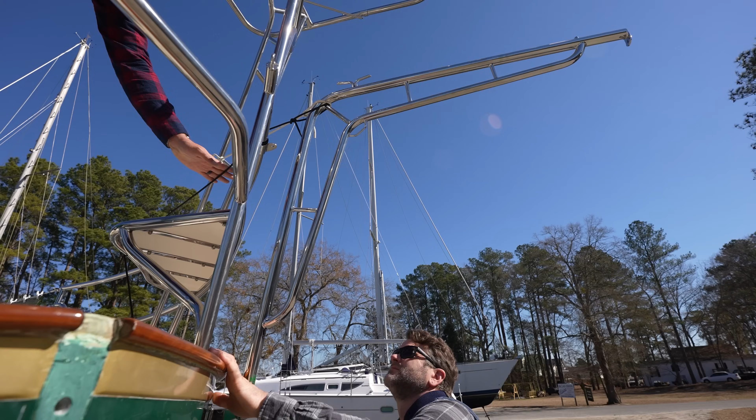All right, so today is the day where we turn this whole mini refit around. By that I mean it's the day that we stop destroying the boat and start putting it back together again. I'm gonna start putting the rigging together, start building our new furlers, and install our new chain plates.

Steve has invited us out for a cold weather sailing race. God, my heart is beating so quickly right now. It's like the perfect Saturday.

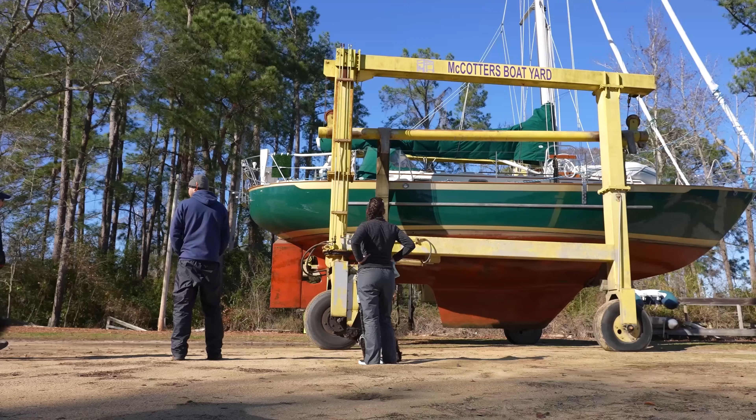I'm Desiree, and this is my husband, Jordan. We're sailing around the world, or at least trying to. We made it as far as Panama on our first boat, Atticus 1, which was a really small fixer-upper. Now we're on our dream sailboat, Atticus 2, but she needs some work before she's ready to cross oceans. So we're working hard to finish up the last of our boat projects so we can sail south to the Caribbean.

So the first step in installing our new chain plates is I've got to clean up and prep the areas where the chain plates are going to mount. But just like any project in the boatyard, step one is digging through all the nooks and crannies of the boat to grab all of my tools.

Okay, so don't tell Desiree that I'm showing you this. The quarter berth is a total disaster right now, and I feel kind of bad, but I don't really have time to clean this up much. We gotta just keep powering through and get these projects done.

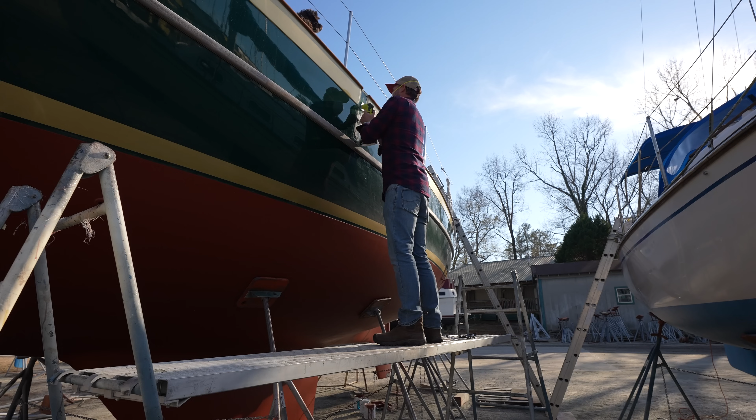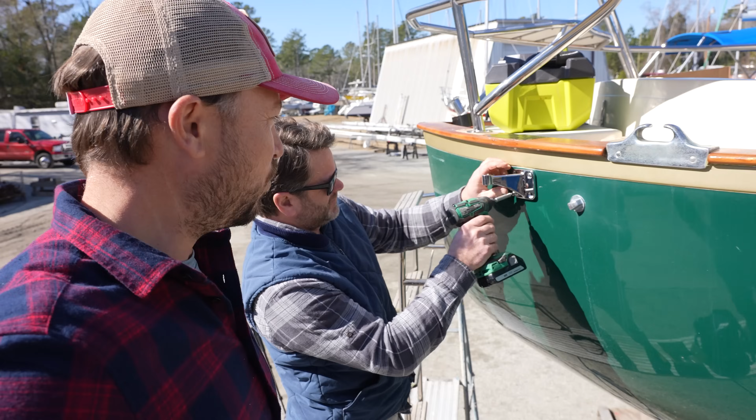Okay, so Mike's back and we're doing round two of dry fitting and measuring and getting everything ready for the davits. Basically we're gonna put in the lower brackets, dry fit them against the hull, and then measure for the top bracket.

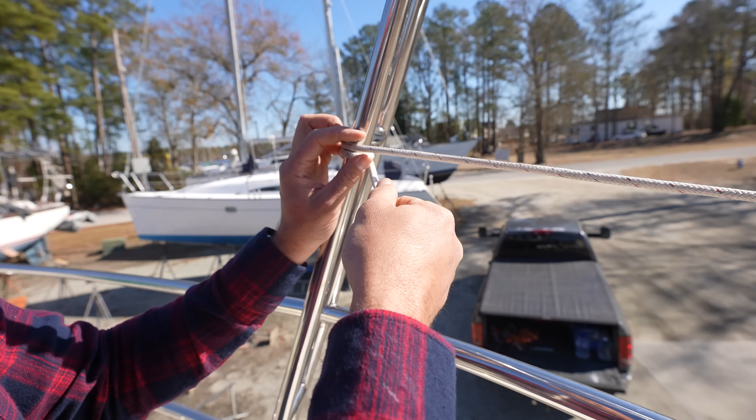You said the only functional issue is that it's center line, right? That it's up and down. This here is just purely aesthetic. Yeah, yep. I think it's perfect.

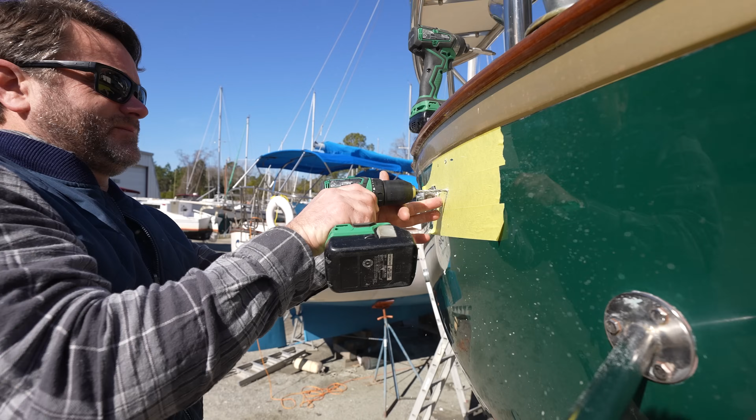Just to line up here, visually, they look like they're pretty much smack dab on. I think that's it. I think we're pretty much symmetrical.

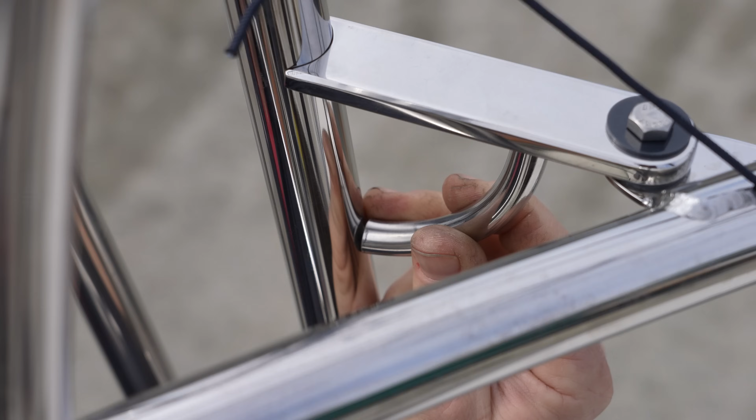Next step is we're just taking these little pieces that Mike made up, putting them in position and tacking them to the davits. Then Mike will be able to take the whole assembly and go back to the shop, fully weld it together, polish it, finish it, and then we'll be able to put these bad boys on.

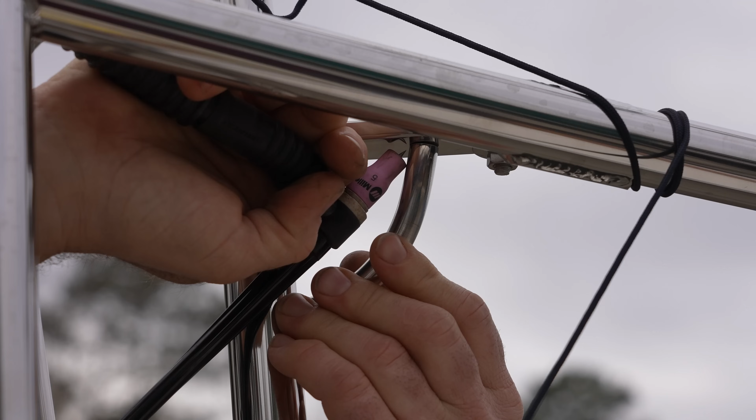Funny because I don't know what I was expecting, but that was really anticlimactic. I was like, we're gonna do it. Dang it, okay.

Hey, look at that good looking guy. How's it going, man? Good, man. Good, how are you doing? Good. It's been a hell of a day, but I'm ready to kick back and talk about sails.

I actually just chatted with John Kretschmer about what he likes to do with cutter rigs and how he likes to sail. He really likes to use the stay sail as much as possible, and over the years he's started having his Genoa size be smaller and his stay sail size be bigger. I like that idea because our Genoa is a little bit big.

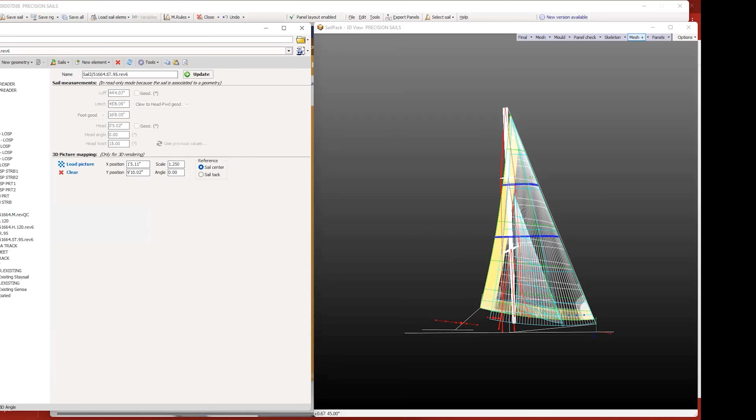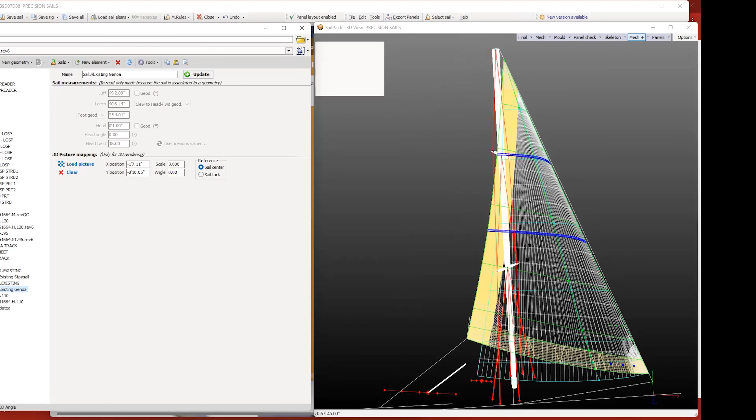I'll do a little screen share over here. I thought we'd start with the head sail. As you can see, because we're going to have to sheet the Genoa around the shrouds, you have a larger sheeting angle of about 24 degrees, at which point you start to really miss this upper spreader. I think honestly a 110 is probably where you're going to want to look. It's going to be roughly the same size as your existing, because your existing just has a lower clew. Perfect for cruising boats.

If we want to make the staysail more pronounced in the sail plan, we might be better off to do the opposite of what we're doing with the Genoa, which is to make it a little more powerful, give it a bit more broad seams, a little less luff hollow, maybe position the draft slightly different. This is actually quite a large staysail. Generally speaking, they run like 70, and this one is pushing a 95. We can do a lot with putting power into a sail that's not just increasing the sail area.

Cool, man, well that was great. Thanks a lot, that was fun. No problem, yeah, it was a lot of fun. Great to see you guys again. Next time we've got to make sure we match again. Yeah, for sure, we'll coordinate this. All right buddy, cool, I'll catch you later. All right.

This weekend we've got my mom and our good family friend Pilar. Steve, our good friend from the marina, has invited us out for a cold weather sailing race. My mom really wants us to win. She's like, I'm watching you.

So how many crew are we gonna have? We are gonna be the three of us and my old man. Are you feeling confident about your crew? Well, I have to now because we've been told we're not allowed to eat if we don't win. So there's some pressure I wasn't expecting. Let's get out there and dominate.

This is my father, Leo. Desiree's mom was telling us if we don't win, we don't get to eat tonight. Is that true? My wife will laugh a lot if we don't win. Basically, the race of the century is what we're trying to describe here. Very competitive. Not everyone's gonna come home alive today. This is gonna get intense.

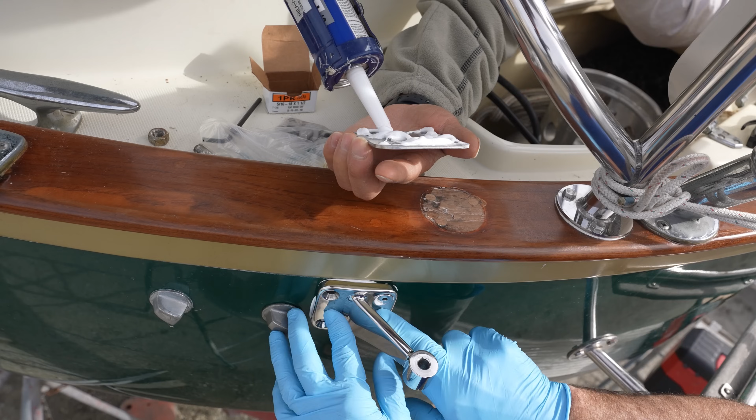Okay, so the guys from Pacific Seacraft are here once again, and today we're going to be tackling the final stage of installing the davits. These davits are going to represent such a huge improvement to our cruising lifestyle.

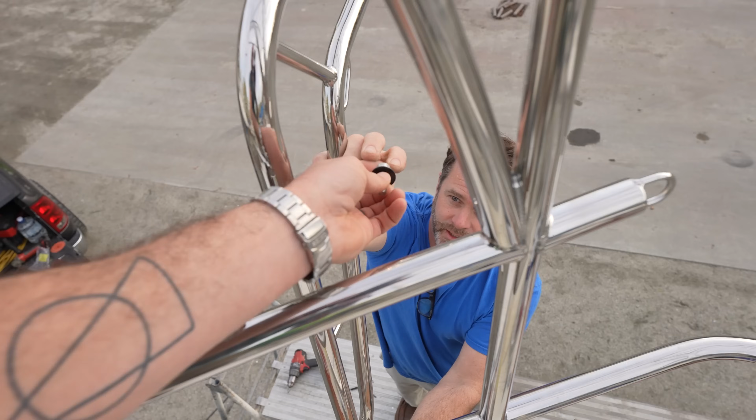Are we installed here, Mike? Fully installed. Nice, all right man. Well this looks great, thanks a lot man. Hey, you're welcome. All right, so we're all set to install the new chain plates, but before I jump into that, I just wanted to explain why we're putting so much work and time and effort into replacing the chain plates that were on the boat.

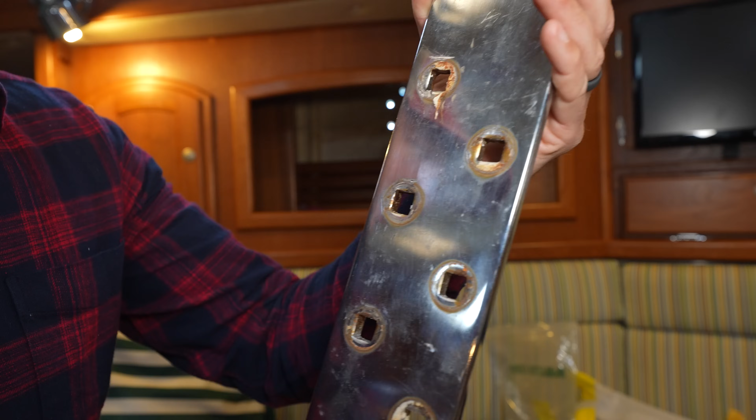So here's one of our old chain plates, and you can see it really doesn't look terrible, right? There's not a whole lot of corrosion to it, just some little rust stains here and there. The backside, a little bit more so, but still not bad.

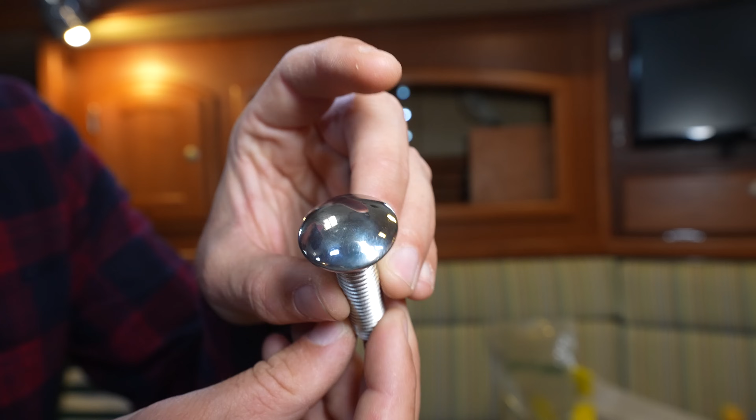There's a really good question as to, do we really need to replace these chain plates? First of all, these chain plates were designed to have carriage bolts put into them. Basically, a carriage bolt has a little square bit just below the cap, and that's what keeps the bolt from turning when you tighten the nut on the other side.

When they made these chain plates, they made these square holes by pressing into the metal. That stresses the metal, and that stress can lead to corrosion and premature failure down the road. Another potential issue with the old chain plates, they often used 304 stainless steel. Nowadays, the standard is to use 316, which is a lot more corrosion resistant.

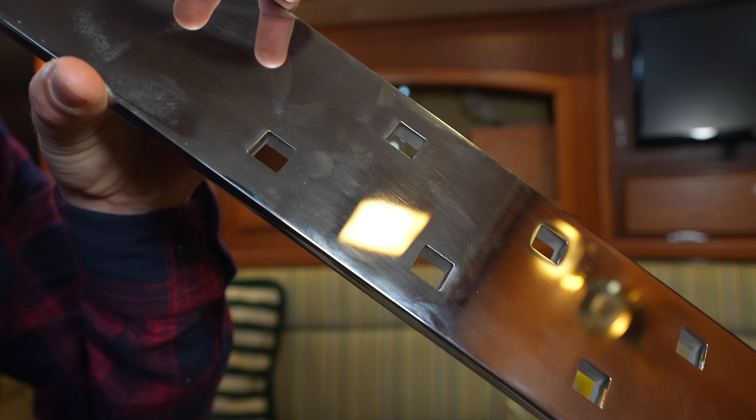So here you can see this is one of our new chain plates. These are cut with a water jet, so that doesn't stress the metal at all compared to pressing those holes. These new chain plates are made out of 316 stainless steel, and then there's the fact that they're brand new, whereas the old chain plates could have suffered some work hardening and stress over time.

Pacific Seacraft actually showed me a chain plate that they pulled off of a boat. They saw a little bit of corrosion on the surface and were wondering if the metal was compromised in any way. So they put the chain plate in a press to bend it. Now, if the chain plate was in good condition, the metal would have just bent, no problem.

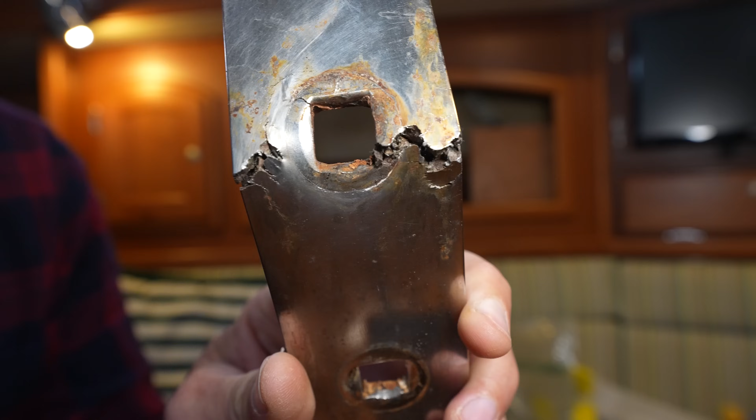But this is what happened instead. Because of existing weaknesses, this thing just totally broke apart. This chain plate was not as strong as it was designed to be initially when they installed it. We want to make sure that the chain plates, which are extremely important, are at 100% of their strength.

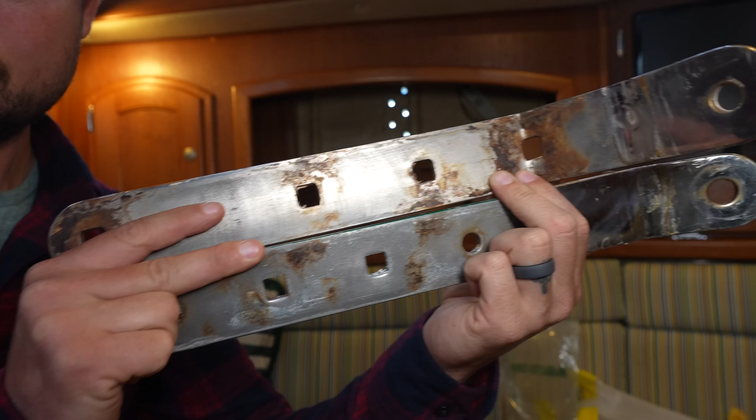If you compare this old broken chain plate to our backstay chain plate that we just removed, they look almost identical. And in a lot of ways, this isn't just about chain plates. What we're talking about is what it takes to prepare a sailboat to sail offshore with an acceptable amount of risk and safety. Sailing offshore is a dangerous activity, period.

It's a constant tug of war between being underprepared and not doing enough, and then doing too much and doing jobs that don't really need to be done. Obviously, it's different for everybody, but we like to be pretty far on the conservative side. Wow, okay, that's enough talking. Let's get to work.

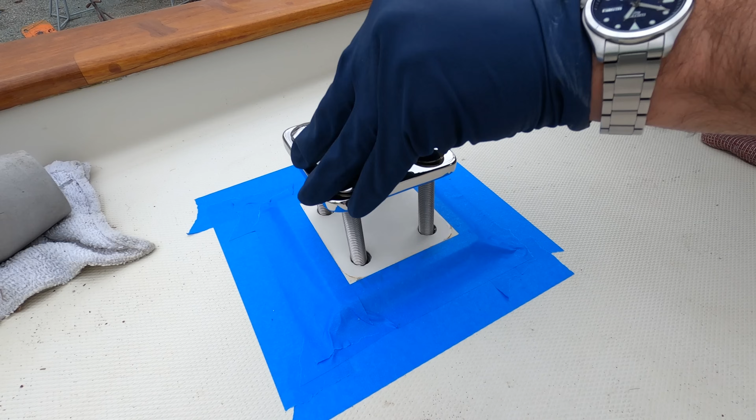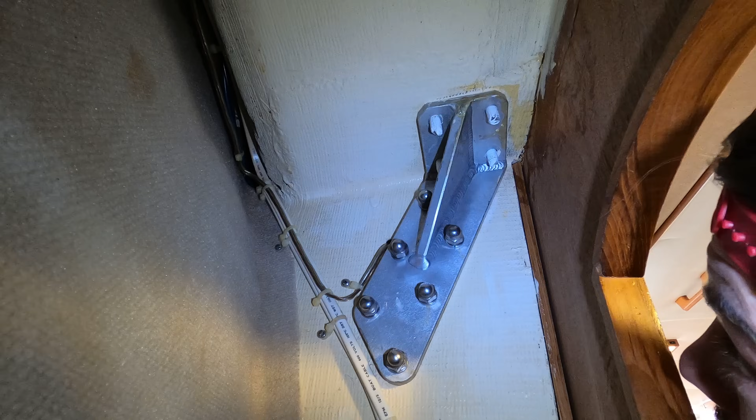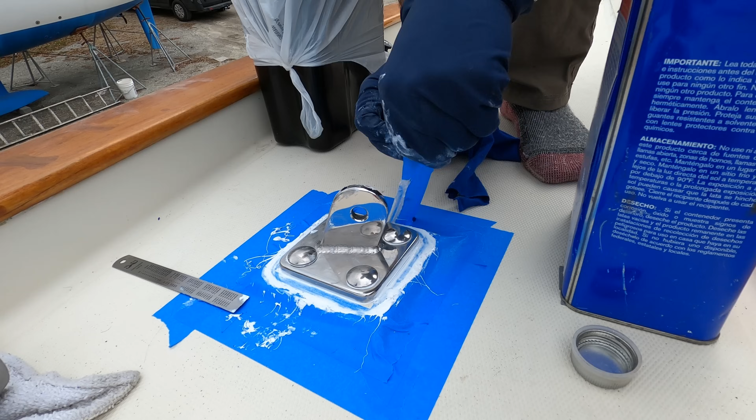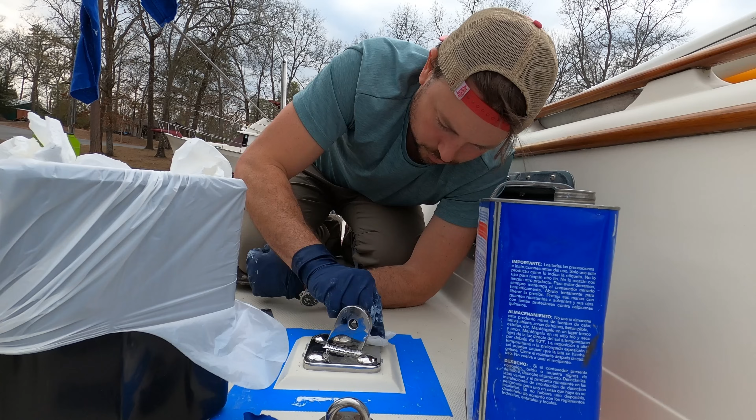Let's do the forward outboard. Boy, that one was easier.

All right, so I'm all finished installing the lower shroud chain plate, and now I'm gonna get started with the outboard chain plates. I'm starting with the backstay chain plate. I went to dry fit it, and I realized that this U-bolt is a little bit too long, so I'm just gonna cut this a little bit shorter.

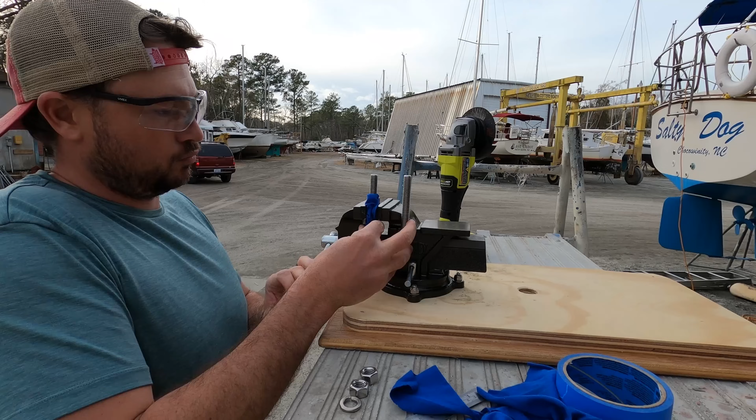The thing I'm kind of pumped about is I get to use my vise that I installed and my new angle grinders.